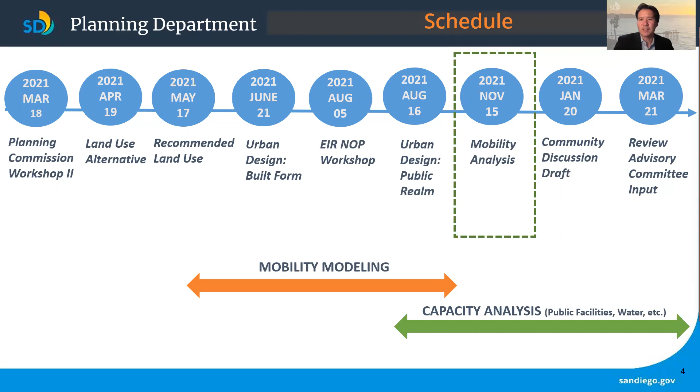So I'll pass it on to Tanner. Great, good evening everybody, it's nice to see you, nice to meet you all. As Alex said, I'm Tanner French, I'm a senior traffic engineer in the city's sustainability and mobility department. We really do thank you for joining us tonight. We understand there's a lot going on, especially tonight it seems.

There's a lot of information to get through, but there's really only 2 main sections to tonight's presentation. First, I'm going to walk everybody through an overview of the mobility vision, which will hopefully explain our mobility philosophy, methodology, and process. Second, Amy and Yari from Kimley Horn and Associates, our mobility consultant for the project, are going to walk you through our future mobility conditions analysis.

The mobility goals established for Mira Mesa and for the plan update are to connect the community by expanding personal mobility options, mainly through a robust active transportation network that is safe, to improve transit by providing infrastructure or right-of-way allocations to improve transit travel speeds and make transit a viable option, and also to modernize mobility by using, and more importantly setting the system up to utilize, future technologies that improve efficiencies.

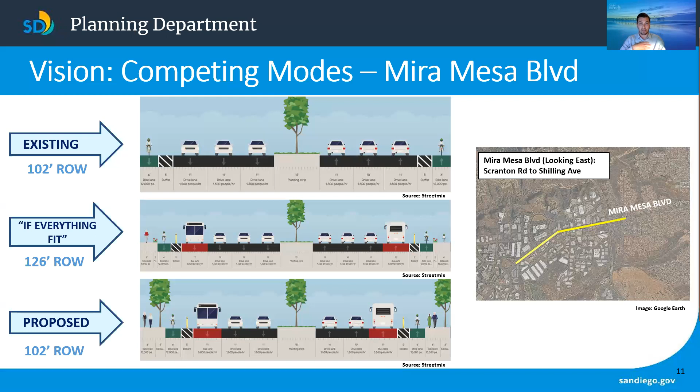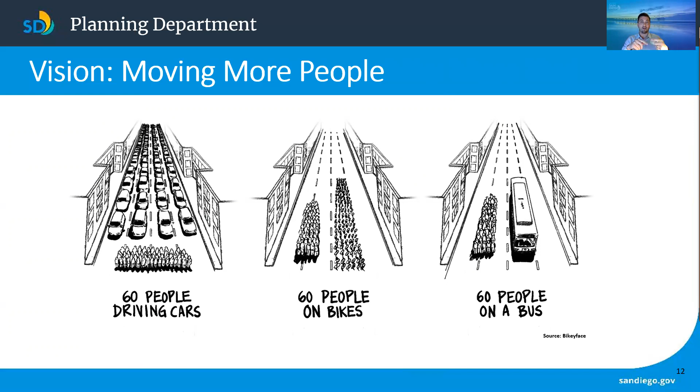As I try to quickly wrap up my portion of the presentation, I want to make a note on vehicular analysis method. This topic is something I could probably spend an hour or more describing, and we don't necessarily have that time tonight.

In essence, analyzing using the level of service metric evaluates intersections and roadways at a microscopic level by analyzing each one individually. It calculates delay using the number of vehicles entering the intersection or roadway. The vehicle miles traveled metric analyzes the whole mobility network at a more macroscopic level by evaluating how many trips are being made and multiplying that by the distance of each trip.

Yari and Amy will get into looking at those metrics, but I wanted to give a preface to what we're talking about in that realm.

The change between level of service and vehicle miles traveled is really notable for a couple of reasons. Importantly, it's now state law that we use the vehicle miles traveled metric to analyze, and not the level of service metric. We can still use level of service in our planning process, it's just not backed by state law. Also, analyzing using the vehicle miles traveled metric candidly allows for recommendations that aren't necessarily centered directly around improvements for vehicles only.

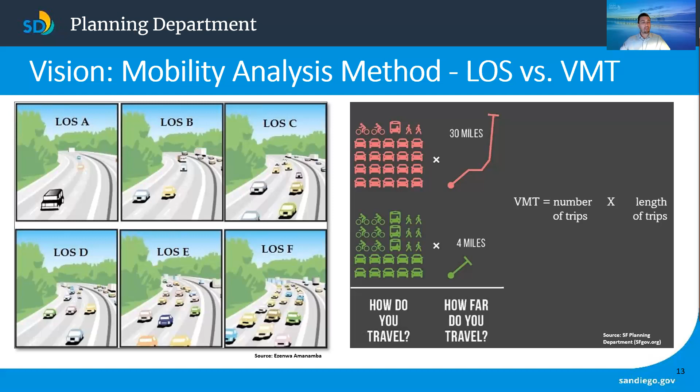So with that introduction of our mobility vision, I'll pass it over to Amy and Yari from Kimley Horn and Associates. But before I do, I want to give a quick overview of how their presentation is structured. As I stated earlier, there is a lot of information, we're about a quarter of the way through. However, it's organized in a manner that should be relatively easy to follow. They'll walk through the future mobility conditions for all four modes, describing how we analyze each mode, existing conditions, recommendations to make it better, and what the analysis looks like after that's done. So with that, I'll pass it over to Amy and Yari for the future mobility conditions.

Thank you, Tanner. Mobility.

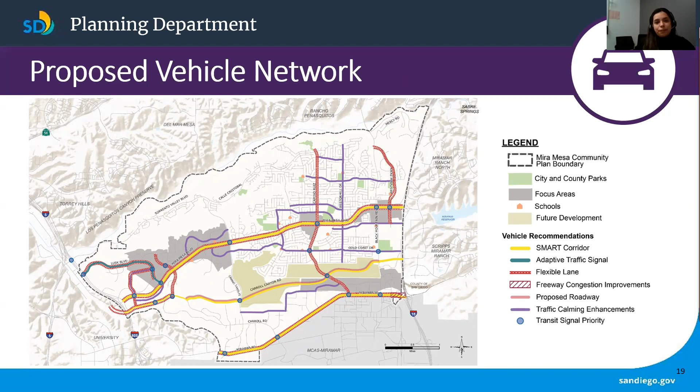Can you define flexible lane? Yes, flexible lane is like a transit lane, but it could also be a high occupancy vehicle lane. So, dedicated to transit, yeah.

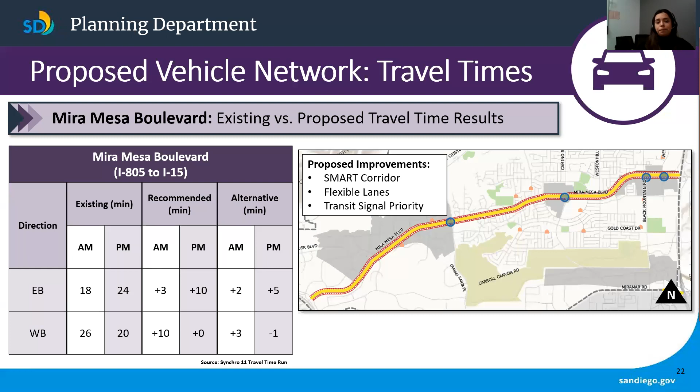Next slide. Miramar Road: you can see an increase in travel time of up to 3 minutes maximum, which would be anticipated in the eastbound direction during the PM peak.

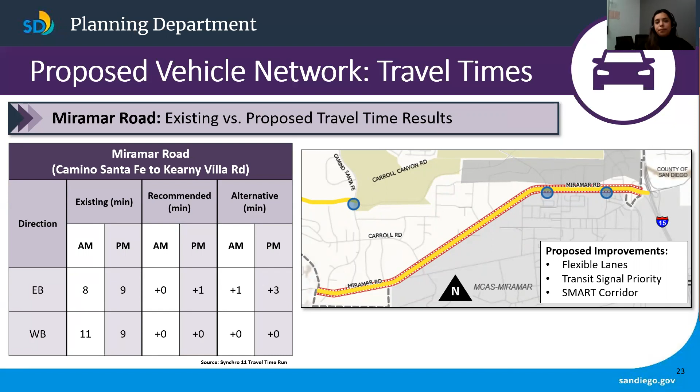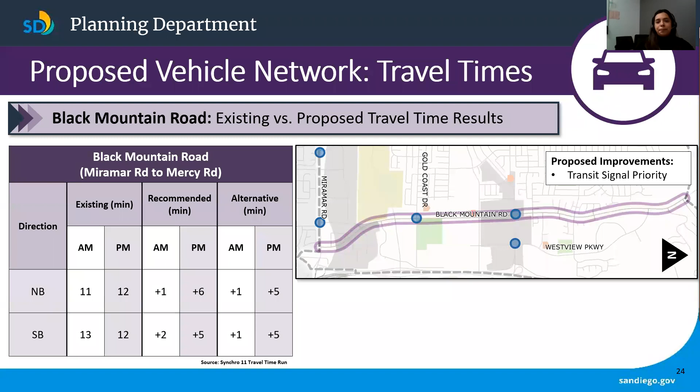And I'll pass it off to Amy for transit analysis. Thanks, Yari. So for transit analysis, we again used travel time data so that we could compare it to the vehicle travel time, to navigate from point A to point B. We'll specifically compare travel time across Mira Mesa Boulevard based on if you're in a vehicle or using transit. This transit travel time also incorporated an assumed wait time based on the bus headway or frequency — the time that you would wait at a bus stop, depending on when we anticipate you arriving for your bus.

Mobility hubs are basically areas that bring multiple forms of transportation together into one location. Flexible lanes, as Yari mentioned earlier, are basically for any form of non-single occupancy vehicle — they could be HOV, transit only, or just dedicated to peak hour use, anything like that. And transit signal priority incorporates advanced technology so that the signal communicates with the transit vehicle fleet, so that when the bus is arriving at the signal, it gets alerted and is able to prioritize that transit movement.

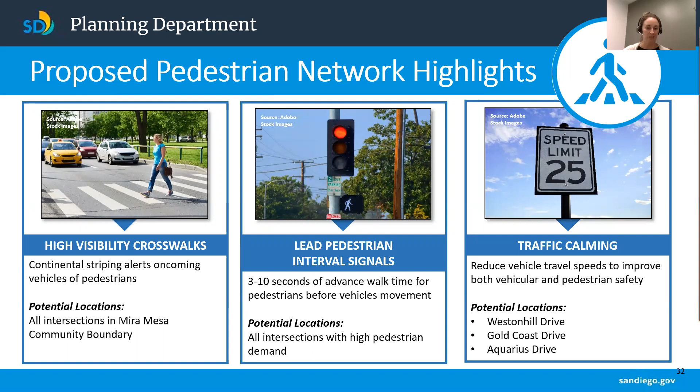Lastly, just a reminder that some of the traffic calming measures that could be implemented could be anything from neighborhood traffic signals or traffic circles to chicanes, speed humps, narrowed travel lanes, anything that reduces the travel speed and increases the quality environment for the pedestrian.

So in the summary of the PEQE scores, it's worth noting that the high quality intersection crossings would increase from less than 1% to 30% as a result of the proposed network, and the number of high and medium quality roadway segments would increase as well.

So for bikes, we have another methodology called bicycle level of traffic stress, or BLTS. Based on the type of facility that is proposed, we factor in various variables such as speed limit, number of travel lanes, the width of the bike lane, if there's parking in place, or if there's any type of buses that would block the bike lane. All of that is factored in to create a score of the level of comfort for the bicyclist.

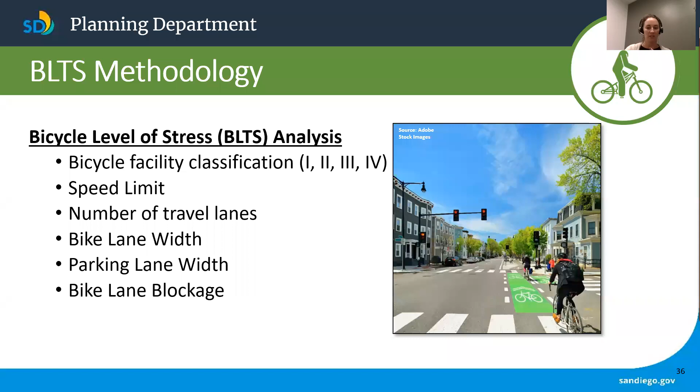So here we have the existing BLTS analysis results. Again, a lot of red, a lot of high stress environments for bicyclists due to mostly speeds, especially on many of our major corridors in the community.

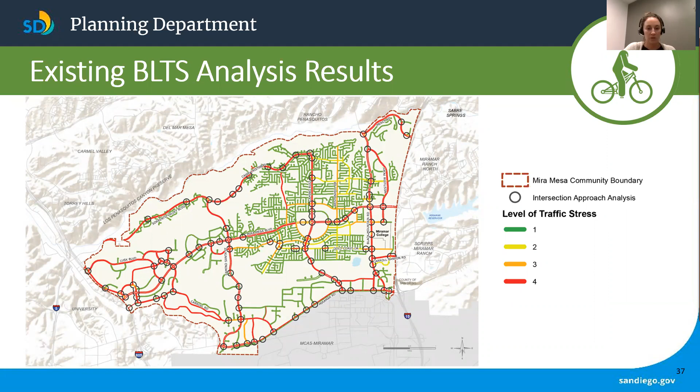So just a review of the different types of classifications. I know this can be a little bit confusing. So Class 1 facility is a path that's basically off of the roadway. It's not within the curb to curb width. It is typically a low stress environment for bicyclists since they're not adjacent to the vehicles.

Class 2 is the buffered bike lane, and that basically includes horizontal protection or horizontal separation between the vehicle and the bicyclist. Class 3 is where you share the roadway space between the bicycles and the vehicles. We've also added the terminology bike boulevard, which means that with Class 3, we've also incorporated some level of vehicle speed reduction or vehicle volume reduction on that roadway in order to make it a more comfortable environment.

And lastly, Class 4, which was added more recently, incorporates the horizontal separation of Class 2, but it also adds a vertical element of separation for the bicyclists as well, making it a more protected facility.

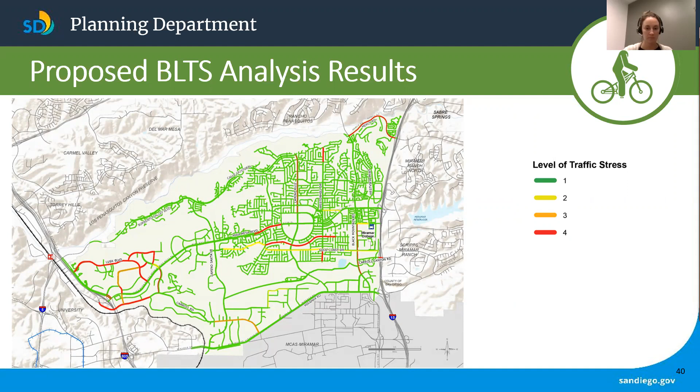So summarizing the bike network, we have proposed about 7.5 miles of class 1 facilities. I'll jump over to the other protected facility, which is class 4. We've proposed about 32 miles of class 4 facilities. It does look like a decrease in class 2, but that's just a result of converting those to class 4 facilities. And then lastly, the class 3 facilities, which is that shared space. We have proposed 25 additional miles of bike boulevard. Again, the bike boulevard incorporates traffic calming. It's not just putting sharrows out there on the roadway and calling it a class 3.

And then lastly, we've summarized the BLTS scores, comparing existing and proposed. The most important pieces to note are that we've increased the BLTS 1 scores from almost 0 to over 70%. And we've decreased the BLTS 4 scores, which is the highest stress environment, from 73 down to 20% in the proposed network. So that is all for the vehicle network, or the multimodal networks.

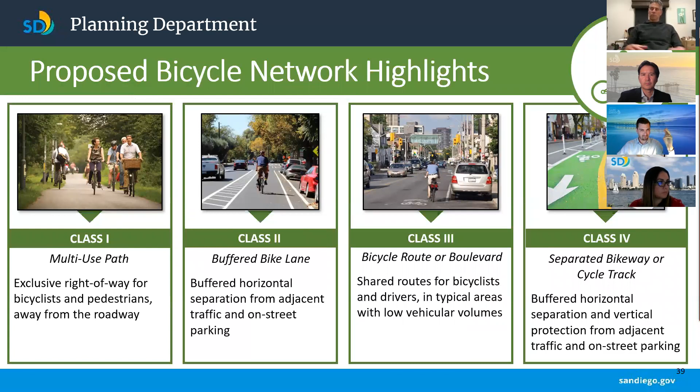I have two questions. The first one is your calming map looked like it was proposing traffic calming measures for Hillery Drive. We did a study on that area when we built the direct access ramp, and at that point it was proven that that street didn't need traffic calming. It actually needed the reverse, it needed something to increase the throughput, because at peak traffic time, that was a parking lot.

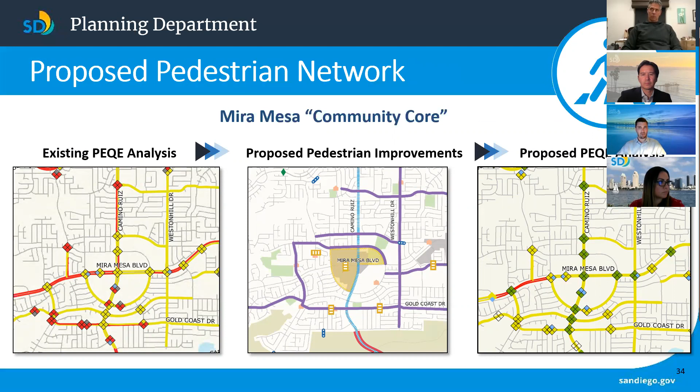And then do you want me to jump down to my Miramar question, or do you want to take that one by itself? Yeah, do we have an answer for that? Okay, yeah, so I can kind of start and people can chime in from the team. But Hillery is the only access point for the community to get from a major transit station further into the community. So if we're trying to encourage people to take transit and potentially convert those trips to other modes of transportation besides vehicle to get into the community, we need to provide a quality access point to get from the transit station to other parts of the community.

And so by doing traffic calming, traffic calming doesn't have anything necessarily to do with reducing vehicle lanes, it's just reducing speed. So we're not trying to remove a lane.

That was my point, the speed at peak travel time is parked. There were videos on YouTube, it is so bad, you average maybe 2 or 3 miles an hour. So I don't see where it needs to be calmed anymore. It actually probably needs work to make it more efficient if you're going to use it as an access to and from that transit center, rather than the current situation where Hillery is a parking lot and people are cutting through residential streets to try and go around it.

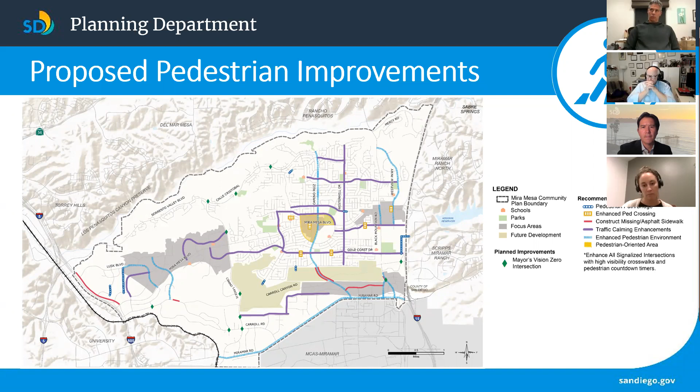Okay, my other question was about the flexible managed lanes you mentioned on Mira Mesa Boulevard and Miramar Road. We saw the figures for Mira Mesa Boulevard, but Miramar Road is a different animal. My concern is what you'd be doing there with flexible lanes, given the near parking lot conditions that occur there, plus the fact that unlike Mira Mesa Boulevard, which has a median system, there are no medians on Miramar Road for a very good reason. It's a highly commercial and industrial area, and you'll find large car carriers and 18-wheelers trying to navigate those cross streets. A flexible lane might make that situation even more dangerous than it is now, if one of those lanes is tied up for transit for a long time. So that was my other concern.

Yeah, I'll take that one. In terms of Miramar Road, and this is why we call them flexible lanes, we want to reserve the right to have that flexibility. For Miramar Road, it would function more like a peak travel lane, where we'd mesh the Route 31 transit with high occupancy vehicles. That would be our way of encouraging more people to carpool along the area, because they'd know they have their designated lane. There's really only one transit route traveling along Miramar Road, so they'd have their dedicated space to maintain reliability and travel times.

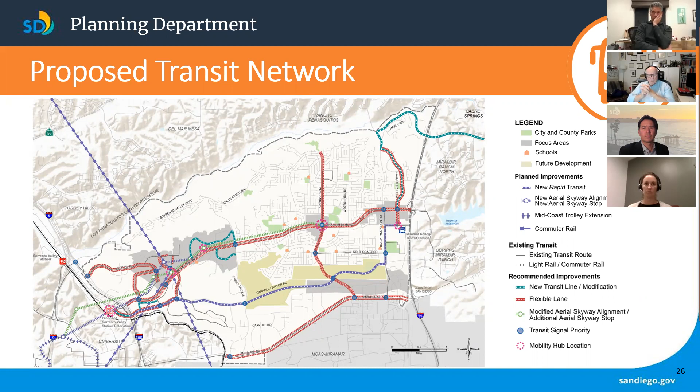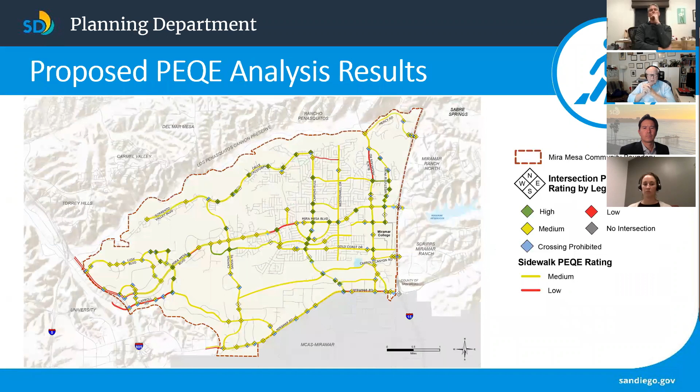And the other point I want to make is that I see 2 of the slides in the presentation which actually show some things for Sorrento Valley Boulevard and Calle Cristobal. Those have been, for the most part, not considered at all. I see some optimistic going from red to green in the patterns that don't make any sense to me, because there are these nice little extra spaces between the bicycle lanes in some of the areas there already. And it's a little hard for me to understand when the reference was created versus when the change is created.

And I'd like to make one other point, similar to Justin's, but the little rubber projectiles, as he's described them, or some kind of bollard that actually protects the cyclists, I think will be necessary, because if you look at the reductions in cars, per capita, it looks good, but per number of cars, I don't think it looks particularly good.

And I actually think that the reduction in times intuitively to me don't actually carry much weight, because if they are based on the current transit schedules, you will be watching the buses go by with 1 or 2 individuals on occasion, and frequently with no one on board. And so I think you've got to deal with SANDAG, you've got to deal with the frequency.

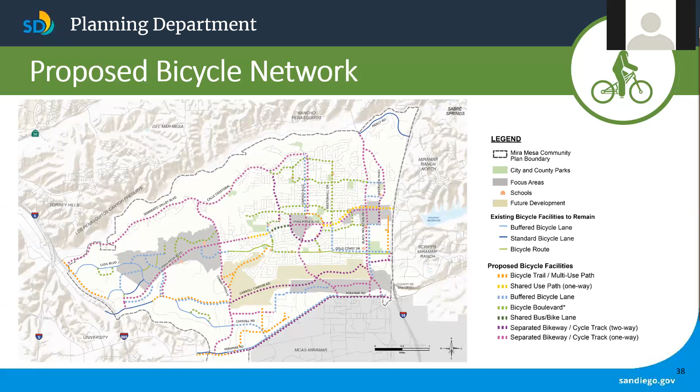Yes, I want to make a comment on the time that you compared, how long does it take to get from point A to point B on Mira Mesa Boulevard using a personal vehicle versus transit. But what's not taken into consideration is almost nobody is going to be going from point A to point B on Mira Mesa Boulevard only.

They're going to need to get off of Mira Mesa Boulevard and go somewhere else. A lot of people live or work not on Mira Mesa Boulevard, but on other streets. And most of the time, there's going to be no way to get there from Mira Mesa Boulevard or Miramar Road for that matter, using transit. So it's not going to be a viable alternative.

Then let's say there is transit, then you get off one bus, you need to get onto another bus. There is a wait time. So to say that you're going to be saving time using transit, I think is quite false. I don't think that in reality, using transit is going to be competitive when you consider that it's not just from point A to point B on this big road, but from point A to Mira Mesa Boulevard, then to point C on Mira Mesa Boulevard, then to point D elsewhere.